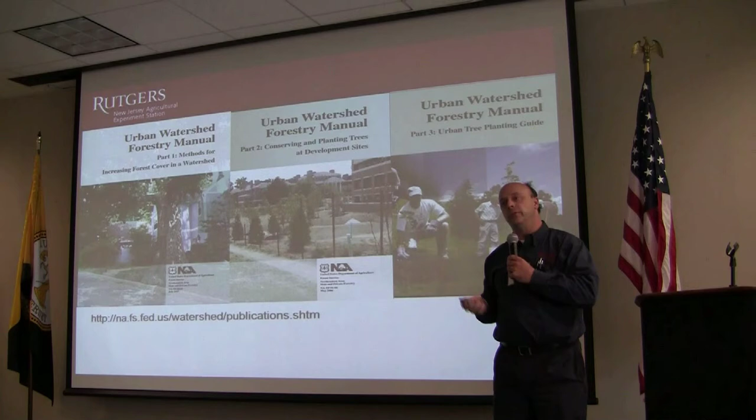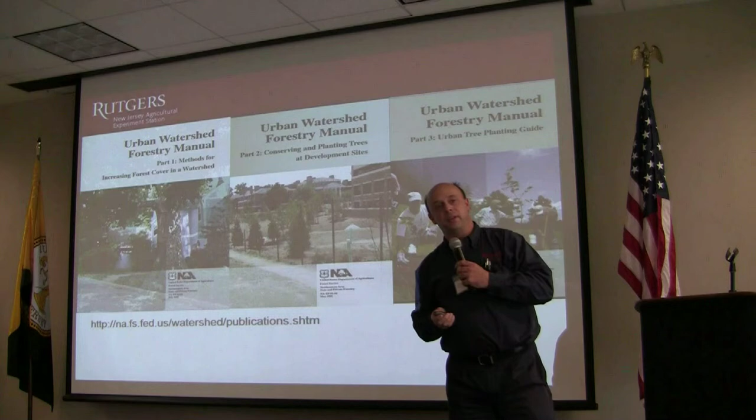And so here's some free downloads. There was a design charrette the Forest Service put on, and there's actually a 3-part series of documents that are on free download, looking at how you can look at forestry within stormwater in a watershed. And there's some very interesting good ideas. There's also some things that I know cannot possibly work. So you need to read these with a critical eye, but there's some very good ideas and maybe some things that can help you connect some of the dots for the things that you're hearing today.

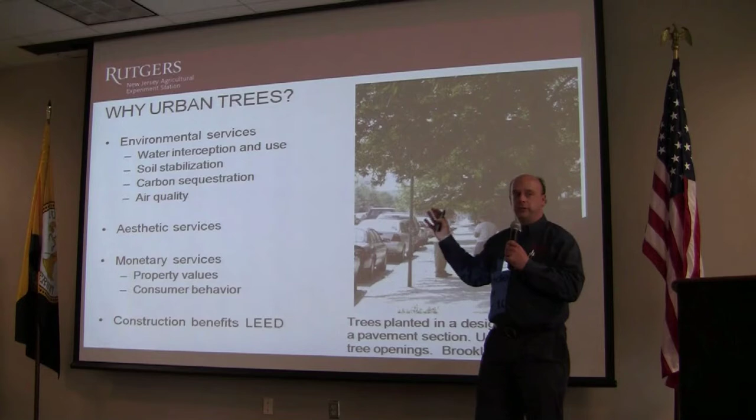We talk about urban trees because they provide environmental services. Okay, and that's important. You know, we talk about water. We can talk about the roots stabilizing soils on embankments. We can talk about carbon sequestration. We can talk about 1 million trees in New York City back in the late 80s, early 90s, when they said to meet the state implementation plan for ozone reduction in New York City, it takes somewhere around 1 million trees to come into compliance.

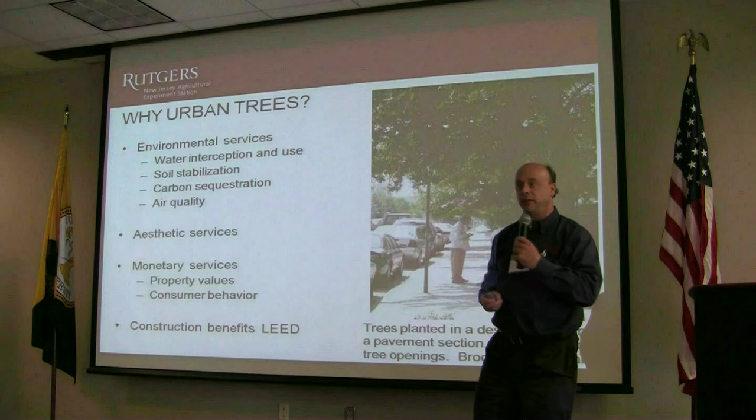And then the Forest Service followed it up with a study saying, you know, we could fit 1 million trees in New York City. New York City, while the number is unreasonable, and I agree with everything that was said, that's the only 1 million tree initiative that has any underpinnings with an understanding of what can be done and where there is some space. Of course, the whole soils thing devolves, and there are a lot of supply chain issues.

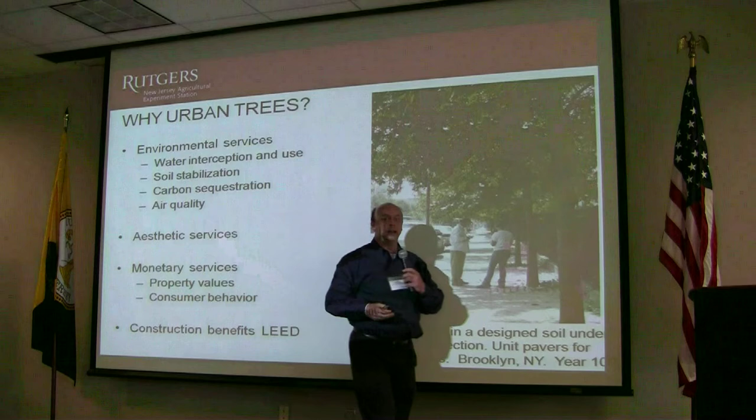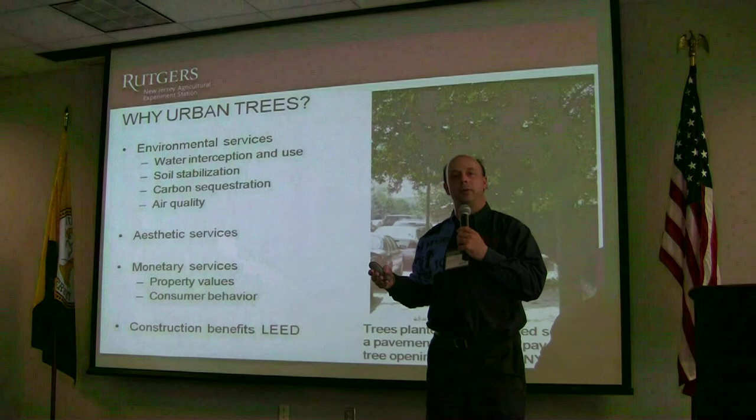Okay, but we know that they can do things, and although I have the aesthetic sense of a dead sheep, there are some people that are very good with design, and trees can provide useful aesthetic and amenity services. But what really counts is we know that if we have a good landscape and it's halfway well maintained, people will drive further, will pay to park, and pay 10 to 15% more per convenience item if there's a good landscape. So it means money if you do it well. And it means less money if you don't do it so well.

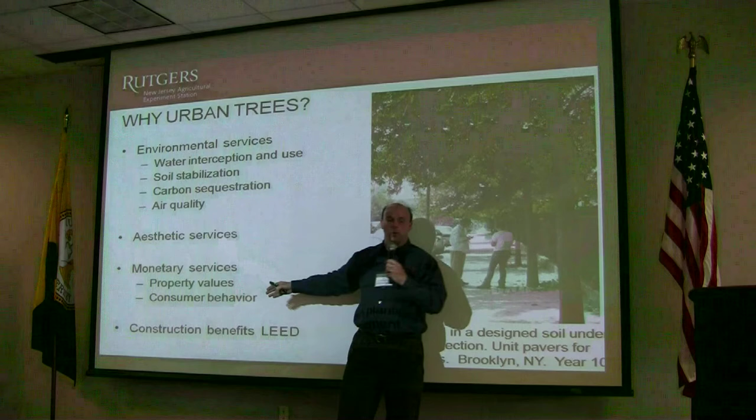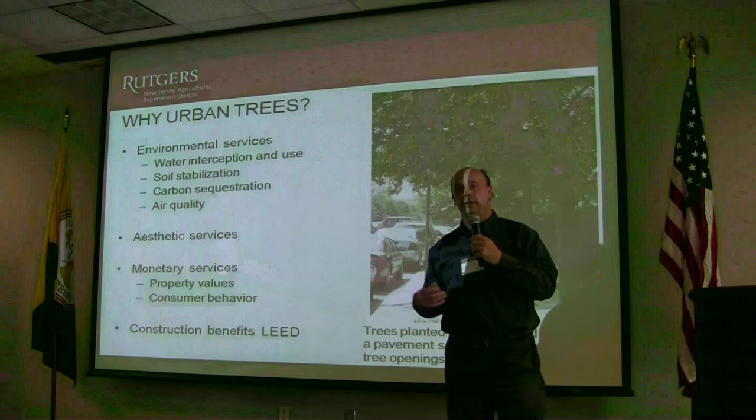And we know that consumer behavior can be changed in parking. We know that if they park in the shade, efflux of volatiles, such as gas off of tanks in a hot parking lot, goes down if there's some shade. So there's very useful things, and we can get LEED certification points and all sorts of gold stars and the occasional cookie at a conference if we do the right thing.

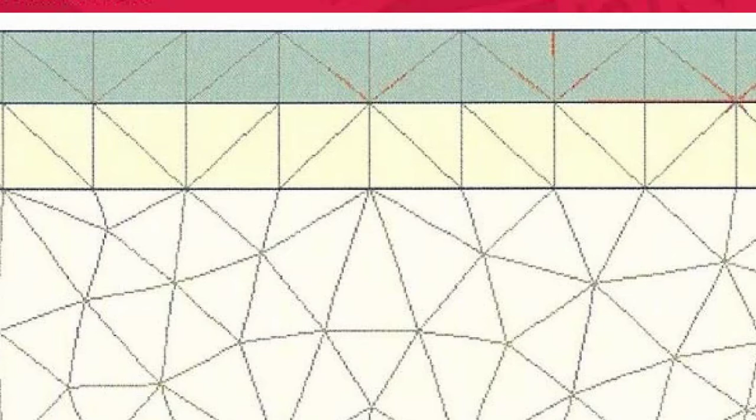Okay, so what we're going to be talking about is porous pavement or pervious pavement. So we have a wearing surface on the top in the darker color. We have a base course material that is compacted to support that wearing surface under a traffic load. But of course that's useless unless you have something underneath that supports that base. And you know, we're always talking about how good porous pavement is, and it can work.

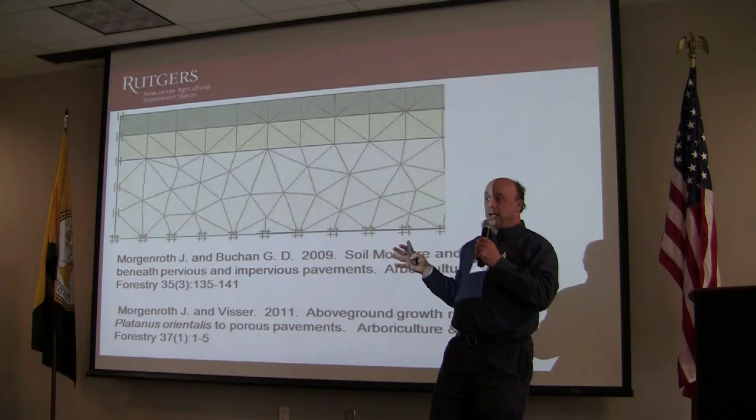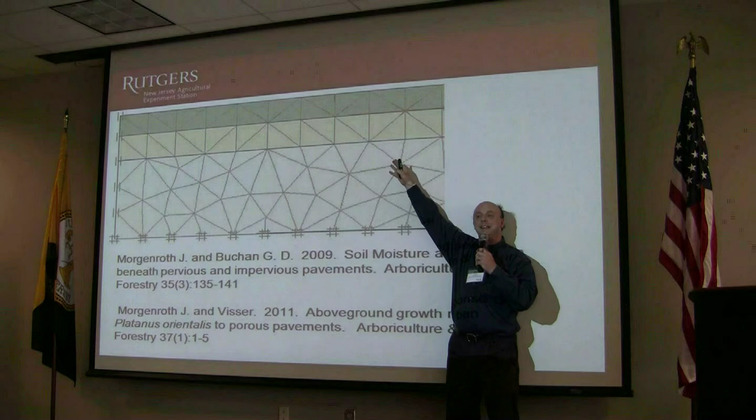Although there's some very interesting data that's been coming out of New Zealand where they say the porous pavement makes no difference to the plant as an organism unless you have something underneath it that it can grow in. If you use a standard profile, the plants aren't going to grow because you have to compact these materials to support any kind of pavement. Okay, so they're all very concerned that porous pavement isn't stacking up.

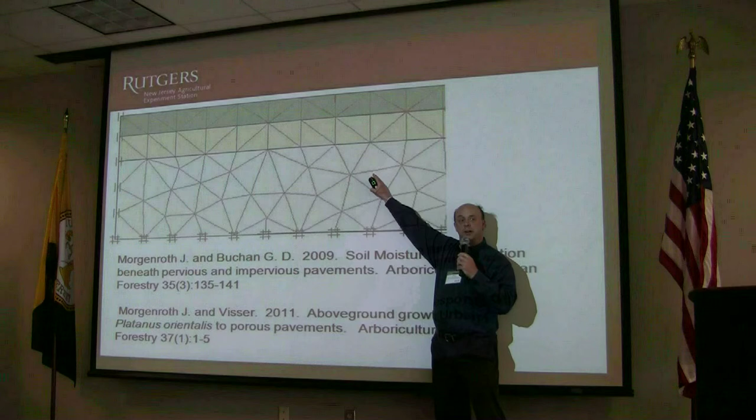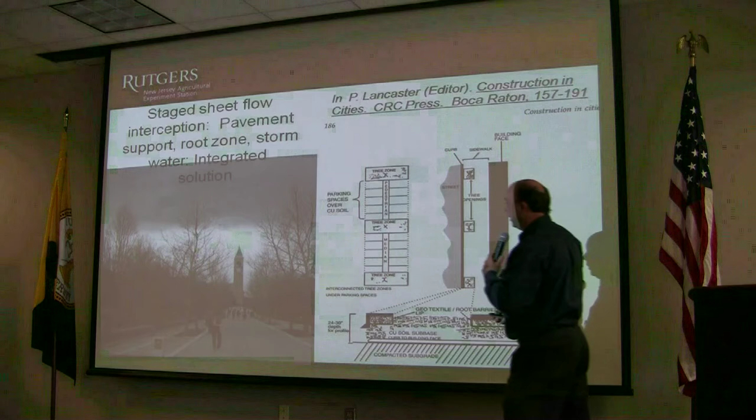What they forgot is that this is a multi-layered engineering system, and you have to take care of the engineering with reference to the biology. And so if we're going to support a pavement, we need to make sure that what we're planting in has some viability as well as some ability for engineering support. And there are a lot of materials out there. This is one project from Cornell.

I always have to spit when I say Cornell. It's just something I do. You know, the fact is when they get in trouble, they call Rutgers.

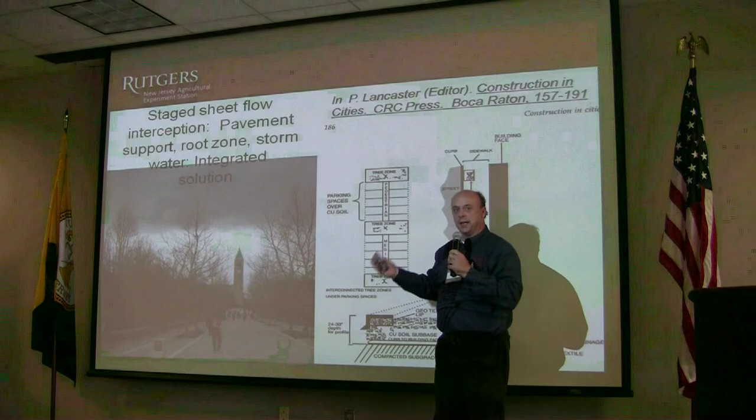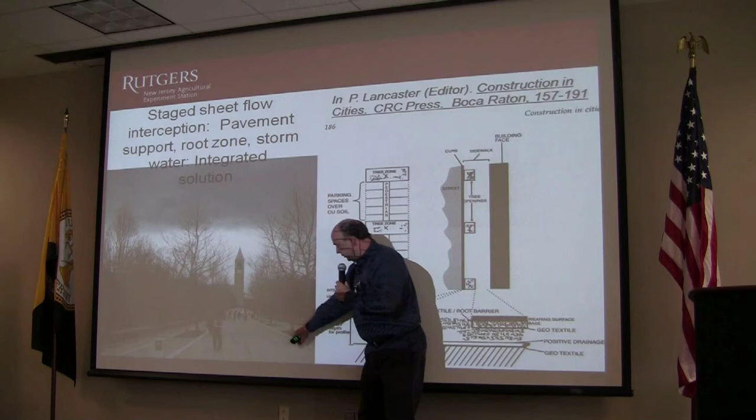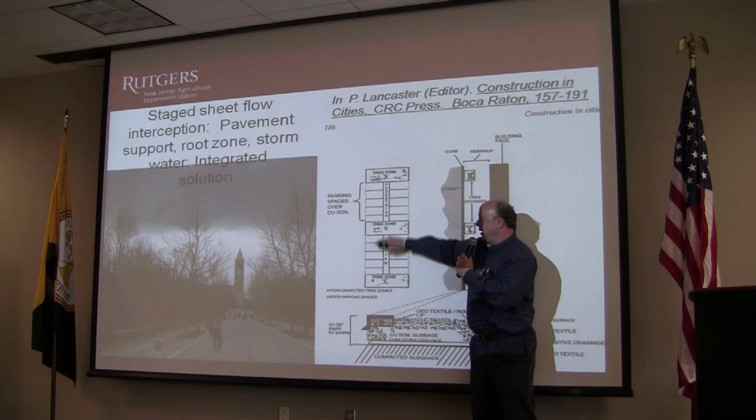So what we have here is a pedestrian thoroughfare where all of the books to their bookstore go up and down during some of the worst loading periods after frost heave in the spring. And what we have is intercepted flow in these openings, but we have a biologically designed material supporting the pavement from side to side. And so what we can do is take the sheet flow, intercept it, and drive it below ground with a porous pavement. Capture that water and then use the trees to de-water the system through transpirational demand.

Okay, so it can work. That was installed, I believe, 1994. I was there with the construction engineers, and this was the first time we translated the research in New York into practice. There are some products that are over in Europe. I know that in Holland, the Amsterdam tree soil has been out there for over 20 years.

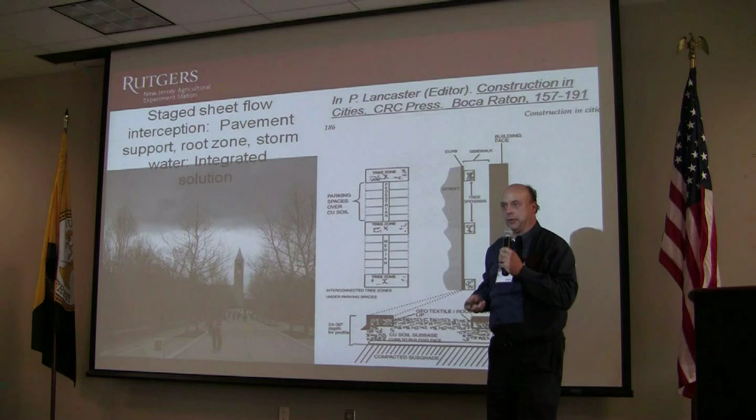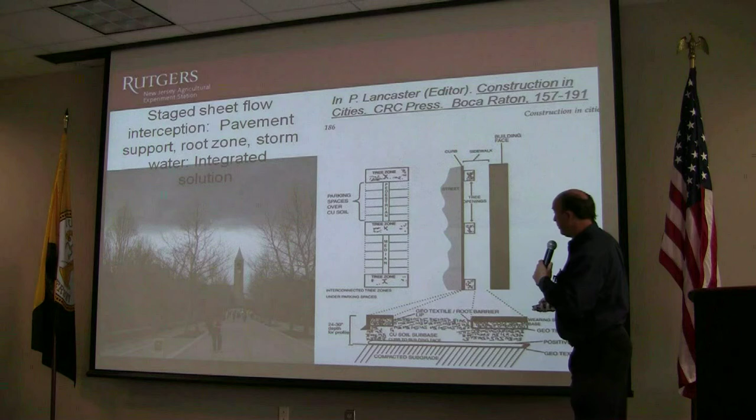There are a lot of different design soils. The point is, you need to know your traffic, you need to know your wearing surface, and then you design your material. And again, you can actually see where some slightly balding Pollock has actually written chapters and shown how this can be done in different books.

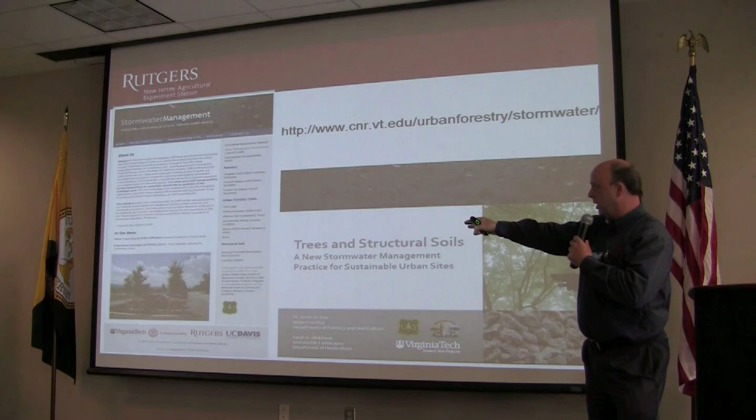VTech, yeah, you gotta believe VTech. They also, whenever they have a problem, they call us Rutgers. When they do, they come out with these things about trees and structural soils. This is another very nice free download that gives you some information. There's a lot more information if you go to the stormwater management site.

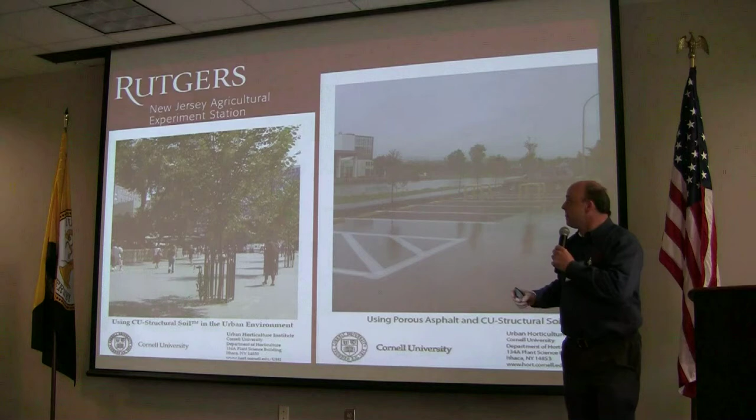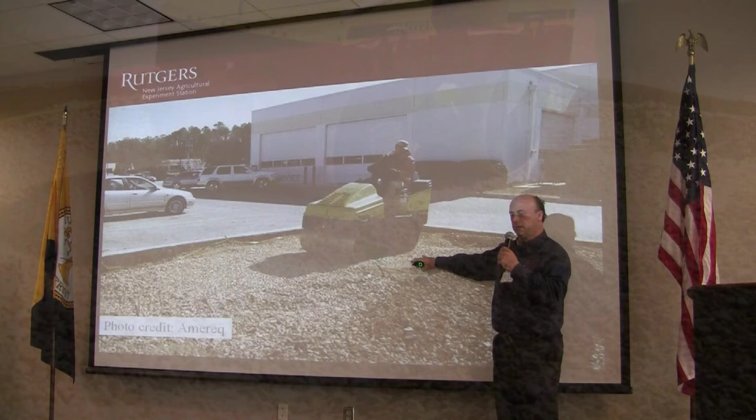Okay. These products, usually they build a load-bearing material out of a coarse aggregate, and in between those coarse aggregates, we put the horticultural component. And the ratio blending really has more to do with the engineering than it does with the biology. Here we have an 80% stone. I believe it's an AASHTO number 4. But in any case, it's about 1.5 inch to 1 inch size aggregate, 80% by weight with 20% by weight of a clay loam soil.

Amereq Corporation does hydrogels. They stabilize the material with hydrogel in this case. And here we're compacting the material, and then we're going to put some turf over that. And now we have what is considered a green parking lot, because all of the water, when they wash their cars, they have no splash because it's going onto grass. And all the water gets driven down and is de-watered by the transpiration of the grass.

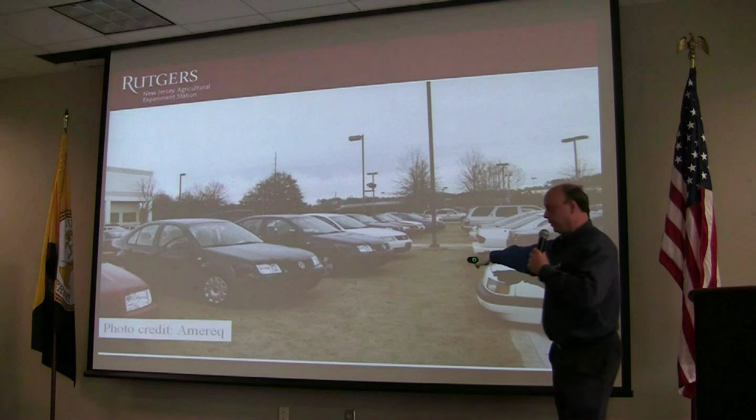And they have preferred customer behavior because they sell many more cars when you're walking on the grass. And it's designed to take that level of traffic load. So you can sell cars, you can have what is technically a zero stormwater runoff here. And you could even put a little bit more water into that coming off of some of the sealed surfaces.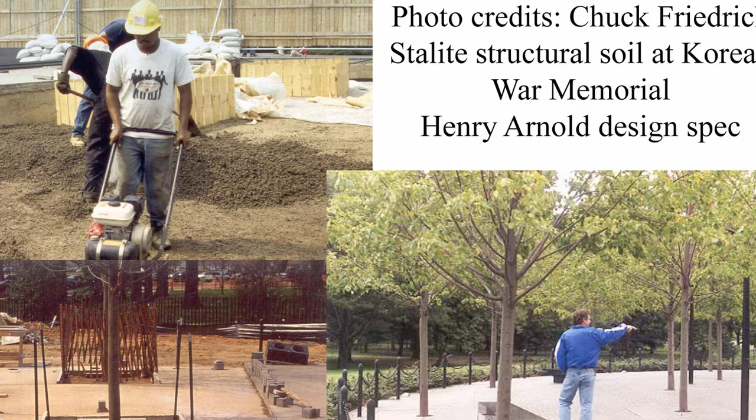This is one of our memorials in Washington, D.C. There's a landscape architect out of the Princeton area and operating in New York called Henry Arnold. He has some very good design soil materials. And in this case, they're compacting it. They put some trees in with some unit pavers. And they established trees for a rather heavily used pedestrian area, being a major national memorial.

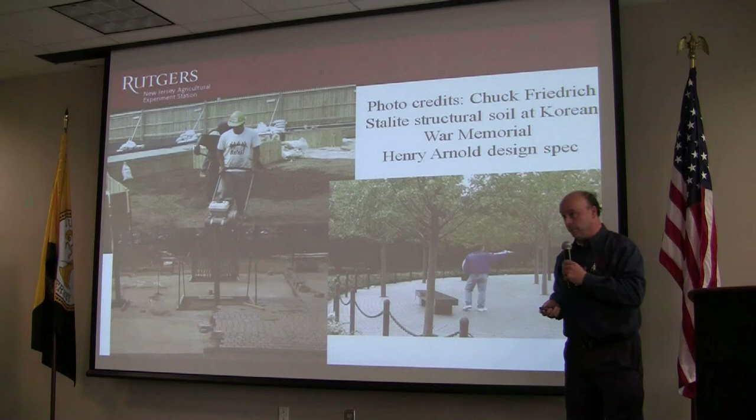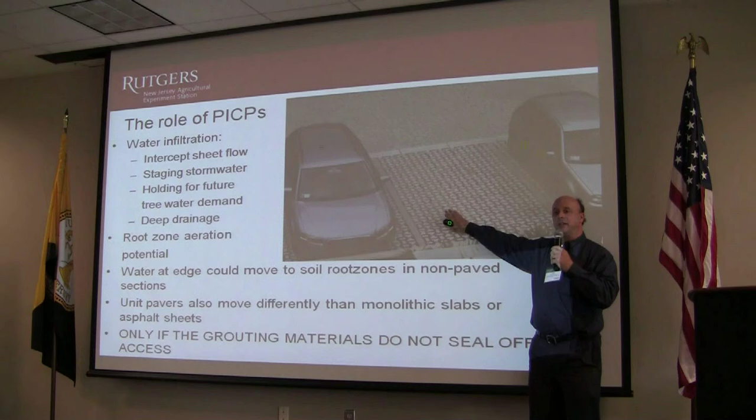I tend to think that when we're talking about cars and things, I like the permeable pavers that are the interlocking, what we call porous interlocking concrete pavers. We know they move. But we also know if we have plant material on the sides and roots underneath, they move upward in a more consistent manner that doesn't destroy the surface. So I kind of like the concrete stuff.

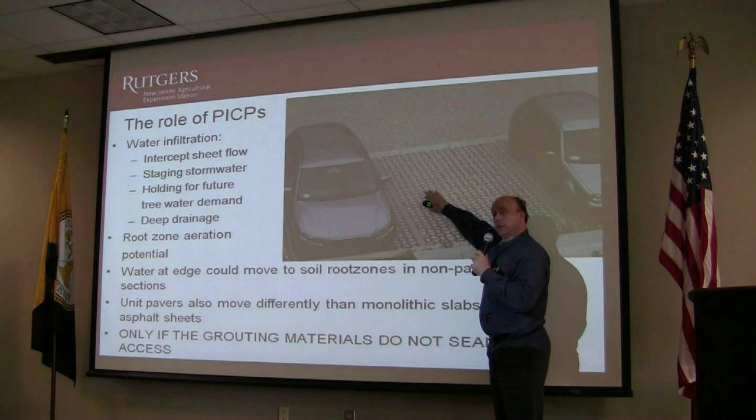I do like the asphalt stuff. I have equal opportunity as long as we know what we're doing, we know what to expect as far as the riffling or the displacement of these surfaces. And what we can do is take sheet flow off of the edge, drive it underneath, hold it. We can de-water it off of the side.

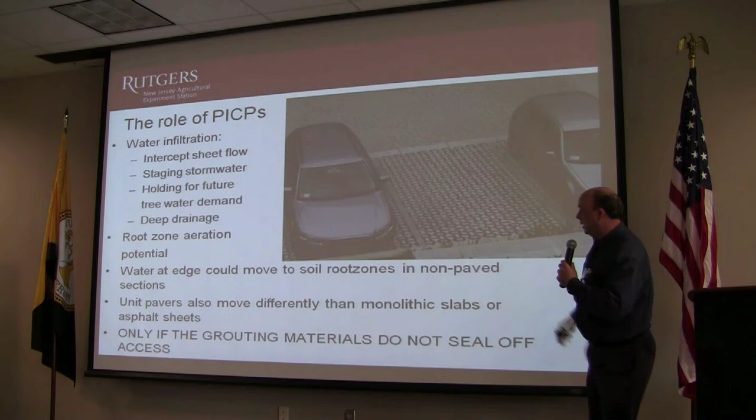We don't have to support the pavement with a horticultural soil if we don't want to, although it does allow you an effective use of space. So there's a lot of different things we can do here. We can use a porous asphalt. One problem I've seen with porous asphalt, it can very easily be maintained. People say it plugs. I haven't seen that much of that. As a matter of fact, I think that is

Well, quick joke, how many academics does it take to change a light bulb? Change? Can't have change. And so I think that sometimes engineers fall into that as well.

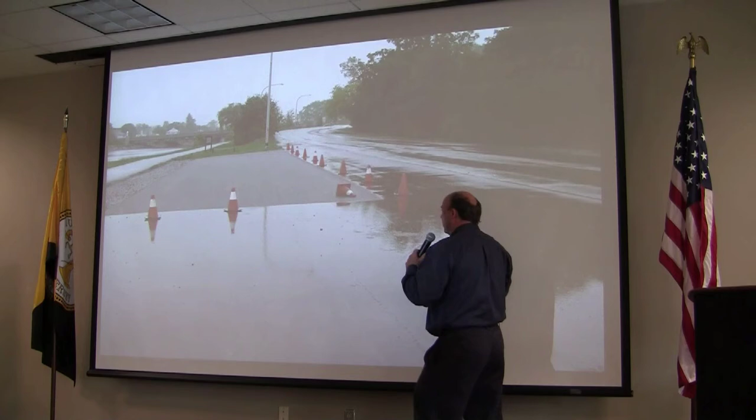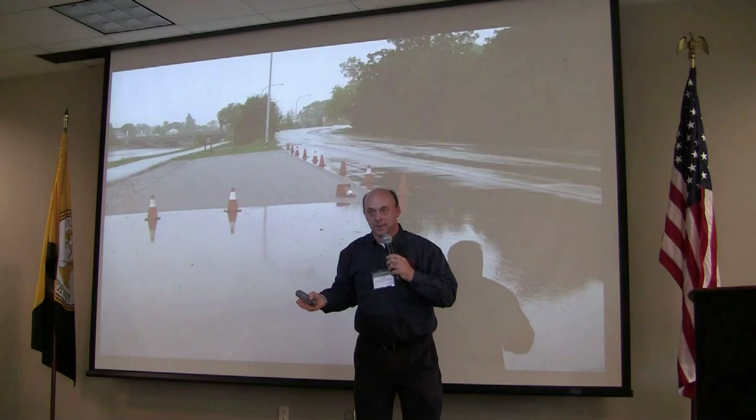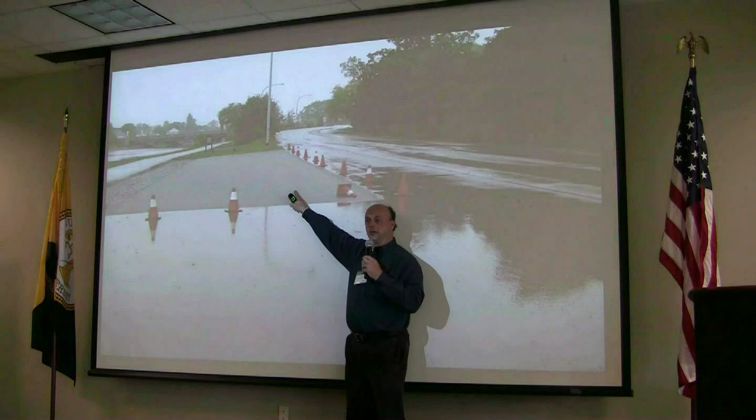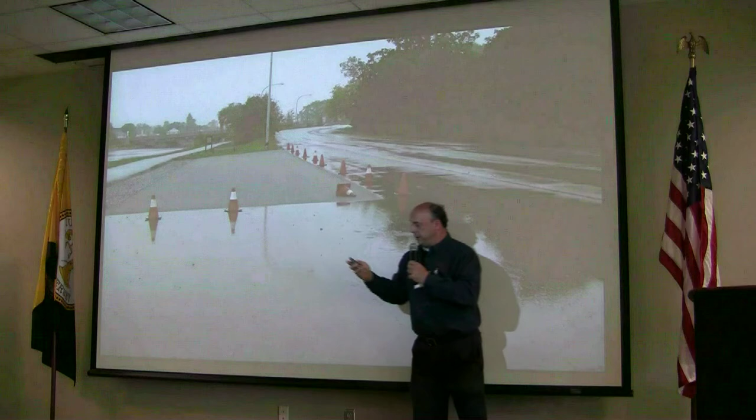And you have to communicate to the DPW that you don't need to seal this because it looks different than this. And that, folks, is a problem. The communications problem is what we really have to address here. Well, we've been doing this for years and years and years, and it seems to work quite well. It's not a new product.

Designing the soils underneath is a little bit of an issue. We're still trying to come up with proactive ways of giving our best designs to meet engineering and horticultural needs. I think that if we look at the old way of voids analysis for Marshall asphalt concrete design, if we put a couple biological indicators in the voids analysis, I think we have a tool.

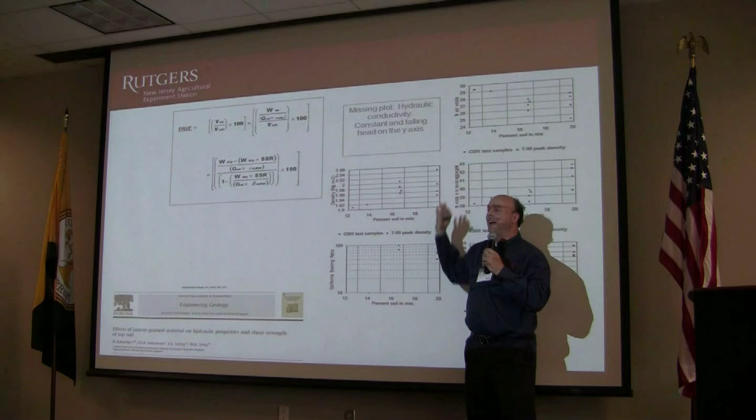I just have to find a graduate student stupid enough to try to work with me.

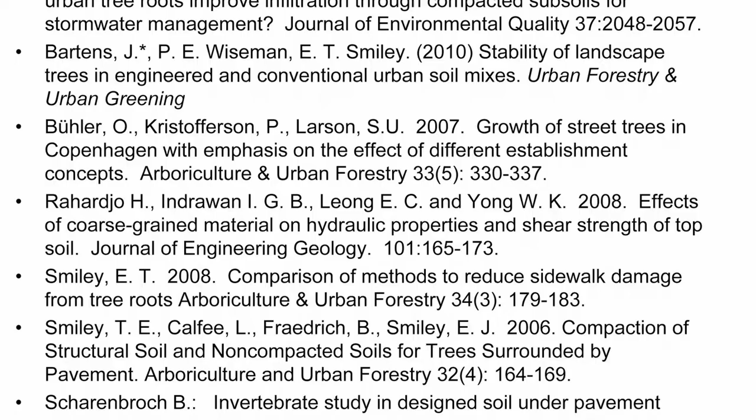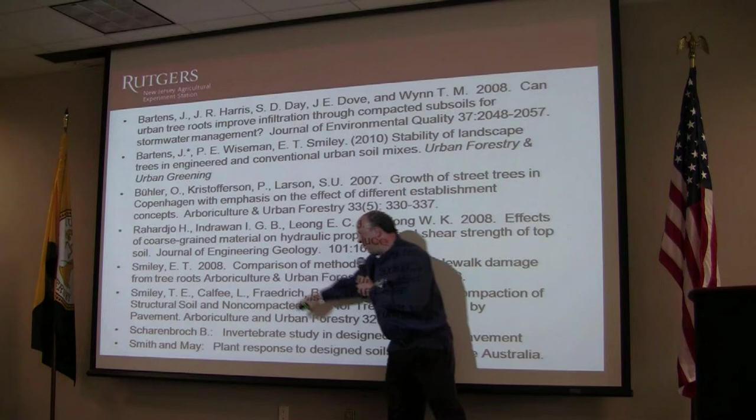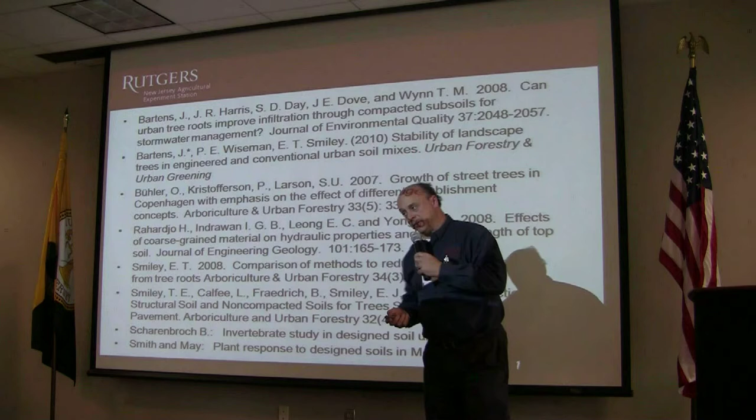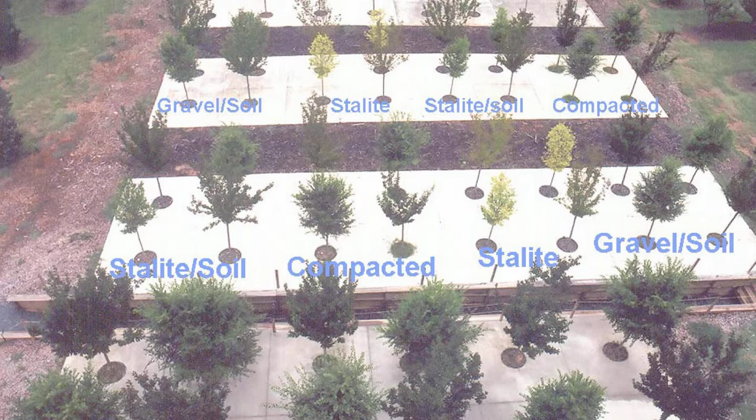As far as design soils, we can design for engineering and biology at the same time, and they can support sealed or porous wearing surfaces. We can even come up with cantilevered designs to hold the pavement over a non-compacted regular agricultural soil. A very expensive option, but a very viable option if you've got that kind of money.

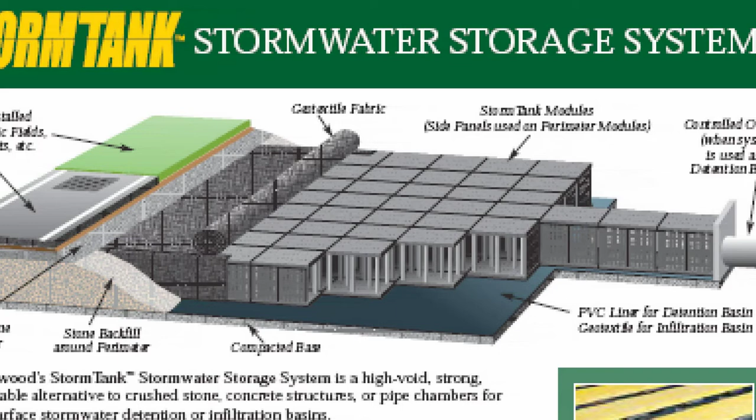And this is just one of several projects looking at different materials out there. But that cantilevering, we're getting a little bit cagier with it, and we're building modular designs. This is Storm Tank. I don't know if anybody's seen Storm Tank. What's nice is that it also goes into like a HydroCAD program applet. But here the water goes into this solid structure, and it's got a 90% void space, actually 97% void space.

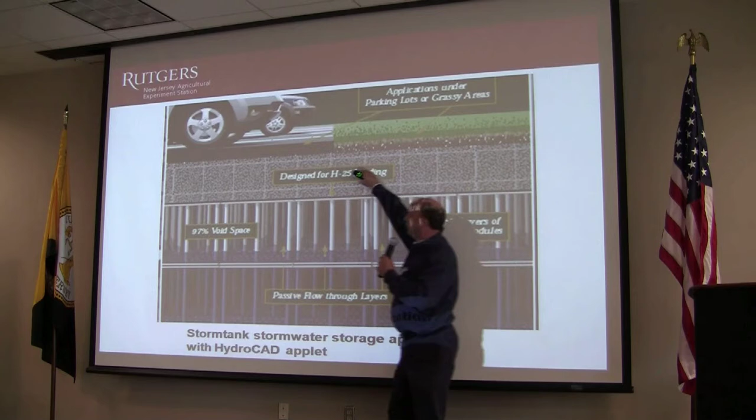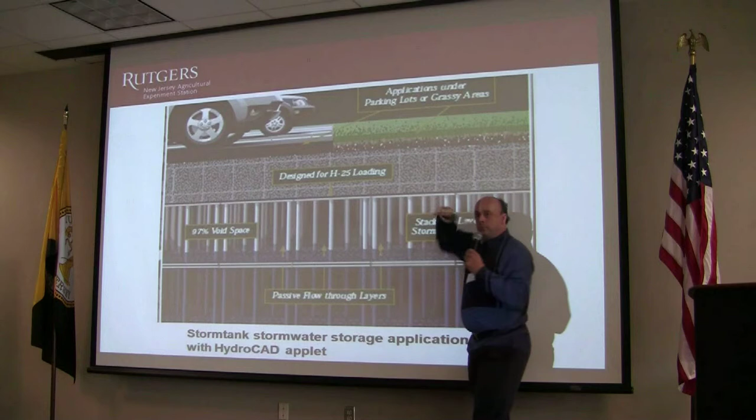It will support your base for your wearing surface and support a porous pavement. You could also put a soil and support vegetation. But the vegetation component is separated from that water. There's a discontinuity, so you can't rely on this to transpire all of that water out.

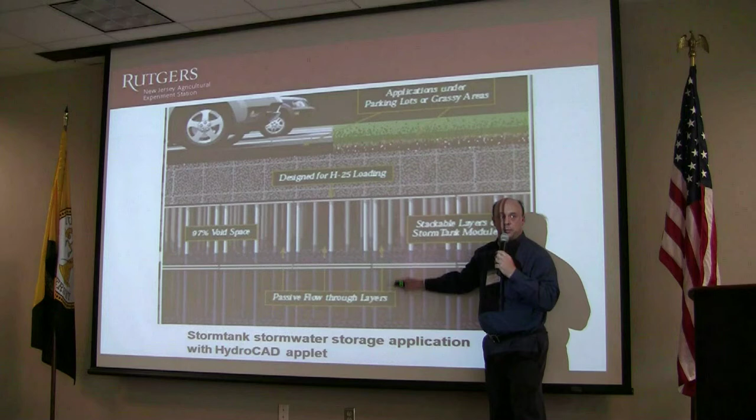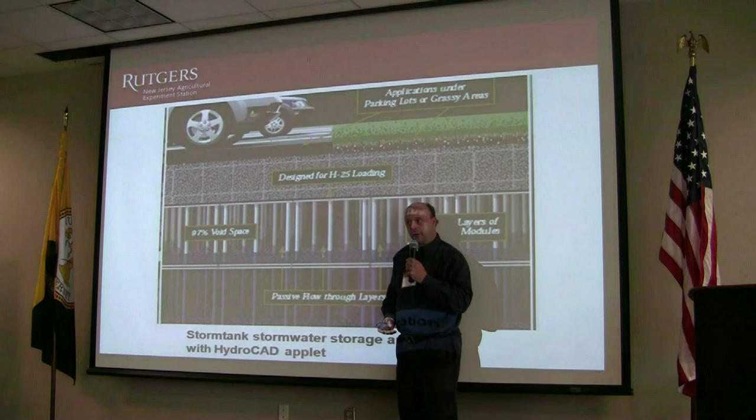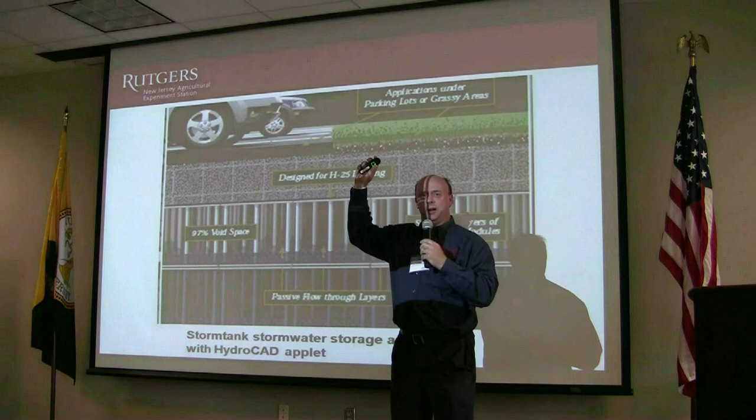But if you can deal with that disconnect, that's very potent to have 97% void space underneath an area like a parking lot and support that traffic loading. It means it's land you don't have to develop for a storm management plan. Okay, and that's valuable. Are we running out of space up here in Jersey City in any particular areas? Yeah, I thought we might be. So this is something to think about.

There's another product out there that is just as good. The general idea behind this is that you fill it with soil, and then you plant a tree in an opening and let it grow in natural agricultural soil. Now if you think about your agricultural soils, instead of a 97% porosity, here you would have maybe 40 to 45%. We don't know all the details on what soils to specify under here, but I'm pretty sure we can figure that one out.

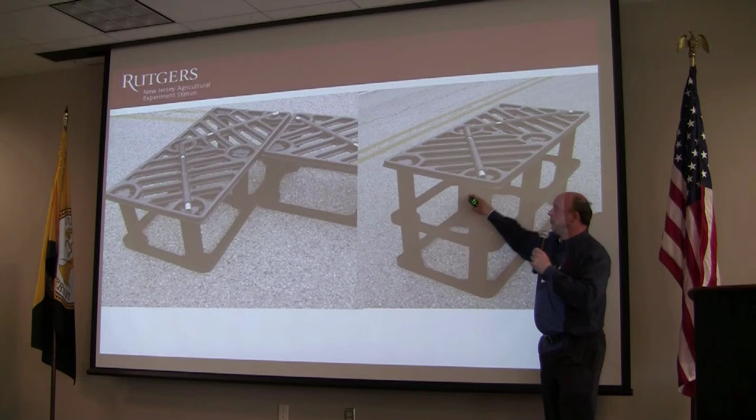But there is this product. Instead of Storm Tank, which I believe is this one, this is called Silva Cell, because it was designed to establish trees and cantilever pavement around the trees. I'm pretty sure that if you change that 97% porosity, you could use HydroCAD for one of these systems as well. They just haven't marketed that.

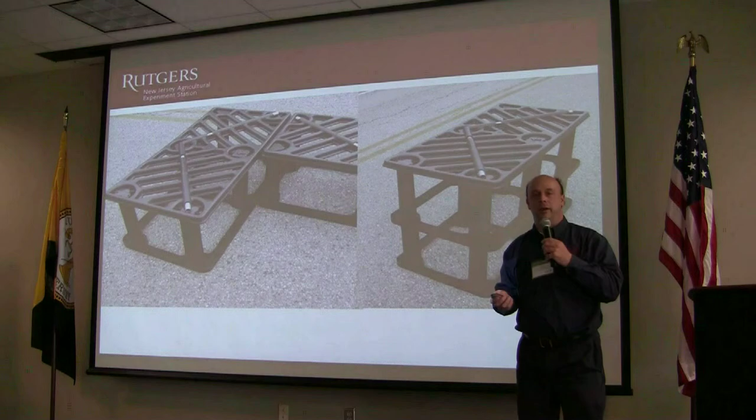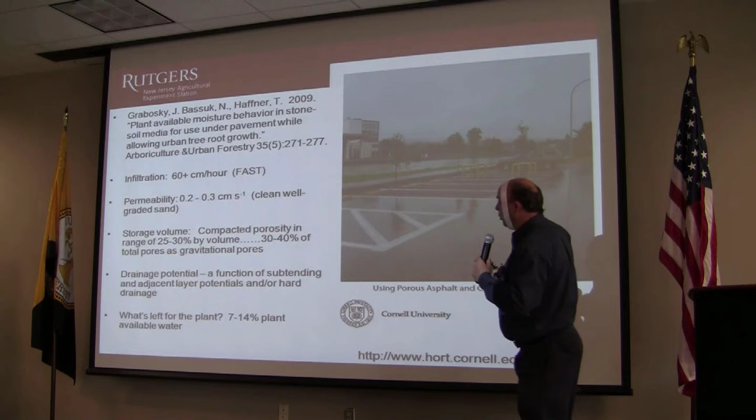If we want to avoid using the plastics, or if we want to go strictly with the pavement design and a designed soil, what we do know is that these materials, the soils themselves after compaction, can take about 60 centimeters per hour of infiltration with water. They can move water down fast, so it won't limit the ability of your porous pavement to take water in.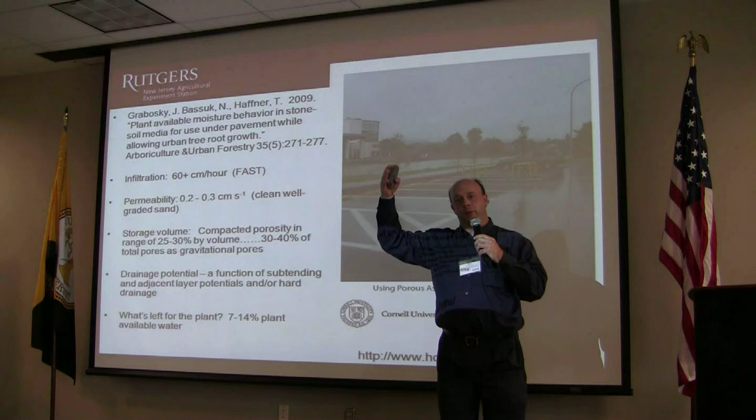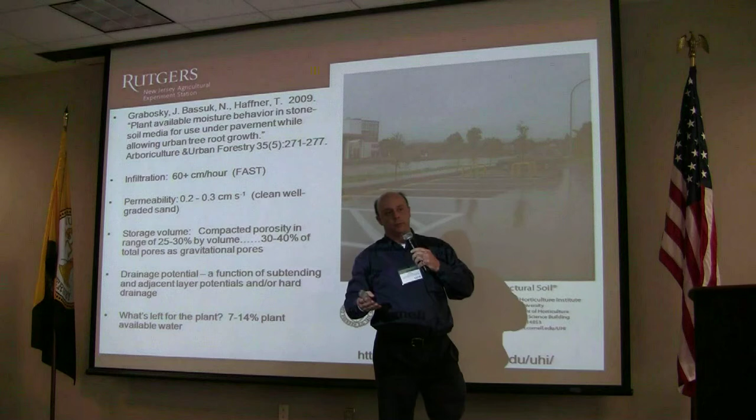We know that it behaves after compaction as a clean, well-graded sand. It has about 25 to 30% volume for voids. We know that it can drain. We figured out how to manage plants in this material. We also know we can land a 747 on it with zero deflection after compaction. We know it will support pavement.

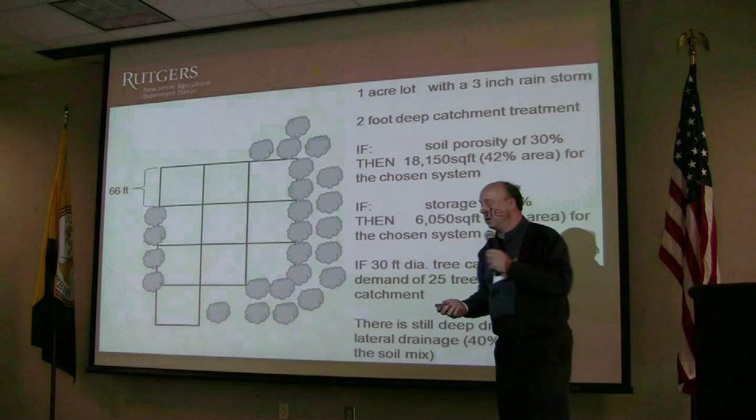But what we could do instead of having a parking lot intercept sheet flow and then having the water drain off to support trees, even with that, we know that 25 trees can take a 3-inch stormwater event and dewater it in about 5 to 6 days. We could intercept that water and start putting the canopy in the middle of the parking lot with the design soil system. So we actually have that technology now.

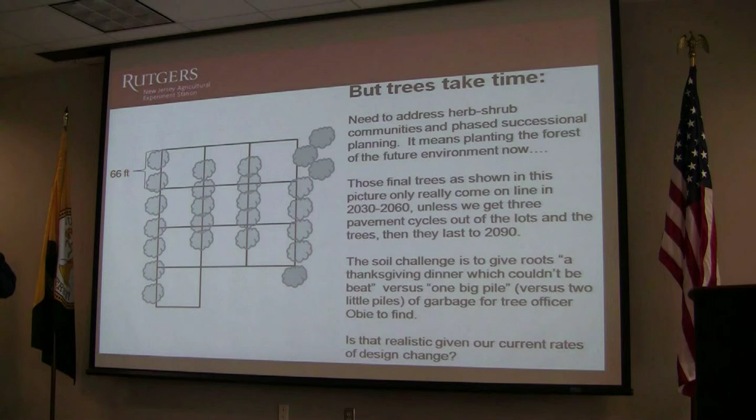Of course, trees take time. These trees don't get planted with a 30-foot canopy. So what we have to do is think about, like the previous speaker, how do we stage our vegetation communities to provide uniform service of transpiration, keep dewatering from day one, and phase it into the canopy. That's one of the issues we really have to look at.

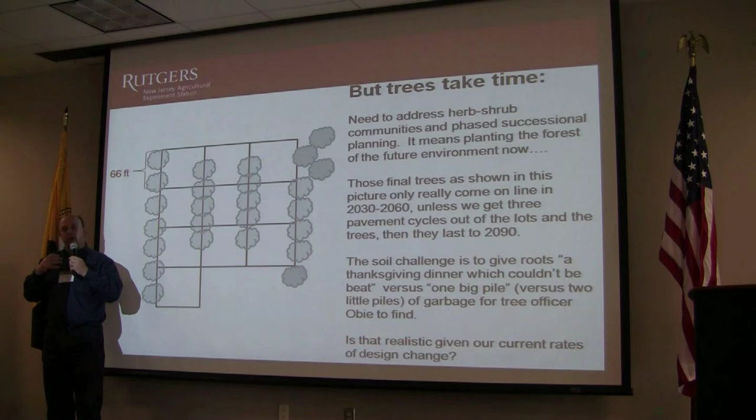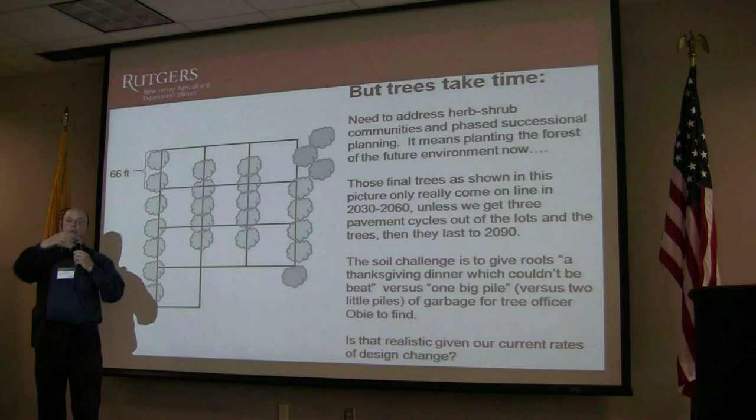And we also have to get rid of the whole native thing. There are very few natives to a concrete parking lot. It sounds obvious, but these are contrived design systems. We know that our environment will be very different 40 years from now when these trees are coming online. So we should be choosing for the biotic aptness of 40 years from now, not from what we had 40 years ago. And that's not good or bad, it's just management.

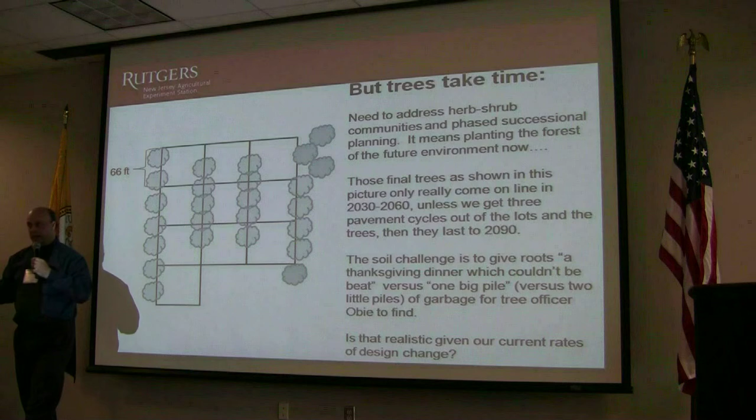These are design systems. We have to think about that, and then worry about the invasive capacity of our choices, and make sure that we factor that into the choice. And I know that I'm out of time.

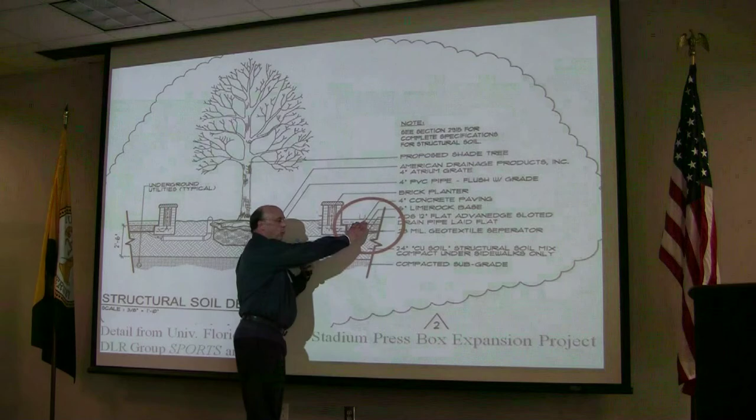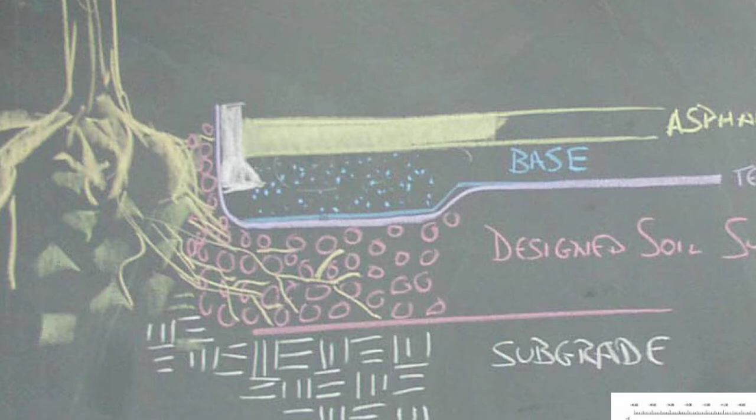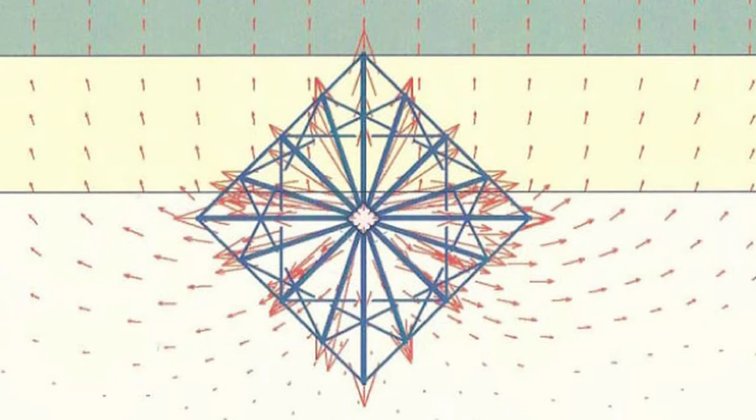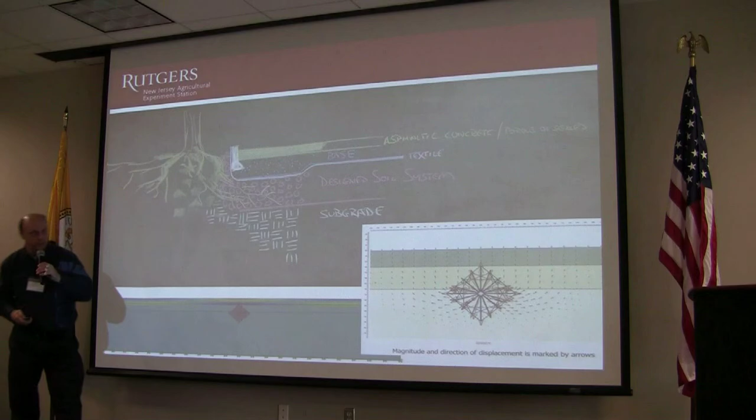But we are coming up with answers, and it does seem reasonable that with a normal wearing surface, by adjusting the base from about 9 inches deep to 4 inches deep, we can accommodate radial root growth and displacement of roots without breaking the surface of that pavement. At least that's what the Center for Advanced Infrastructure and Transportation is telling us. I'm a biologist, not an engineer, but the engineers are saying we can do this now. So I think you'll find in the next 5 or 6 years we'll have some of these design details out in full. And just remember, trees are complicated, pavement's complicated, but trees and pavement with stormwater is complex.